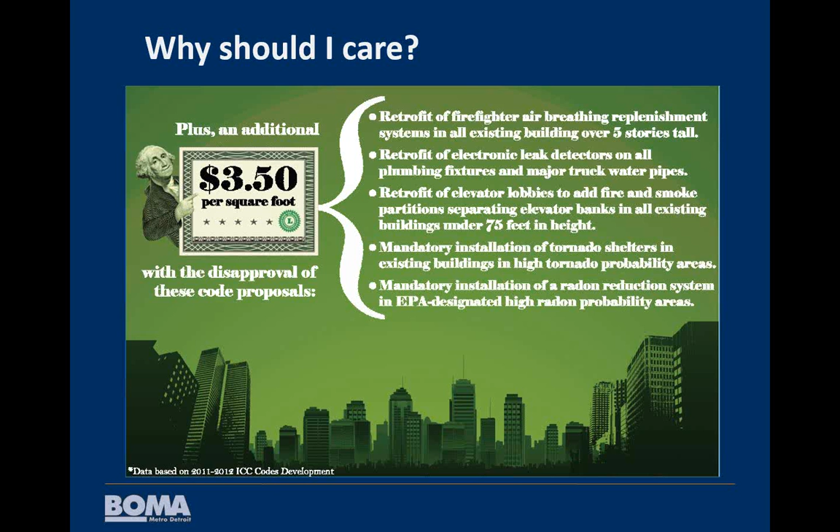So briefly, why I believe you should care about these things: there's a lot of money involved in code requirements. BOMA has done a great deal of work at the national level to affect the ICC codes, and they feel they've been able to bring about substantial cost savings, both by making changes to the current codes and also by keeping out some proposed changes that would be quite expensive to implement. I see here they were estimating about $3.50 a square foot. I think they now believe it's closer to $6 a square foot that they've been able to save building owners through the changes they've kept out of the code.

Just a little bit on the code cycle. I probably need to give everyone some background—codes 101, how do we develop and adopt building codes in the U.S. First, there's a model building code currently developed by the International Code Council. In years past, there had been several different groups that developed and promulgated model building codes, but they all came together back about 20 years ago, and since then there's just been one model building code used pretty universally throughout the United States.

They have a 3-year cycle, so every 3 years they come out with an updated set of codes. After they've developed and adopted them, Michigan takes those model codes, reviews the changes that have been made, and incorporates them into the administrative rules that are the Michigan Building Code. We have the advantage here in Michigan that the entire state is under the same code. In other states, each municipality can adopt their own code, but in Michigan it's one uniform code throughout the state.

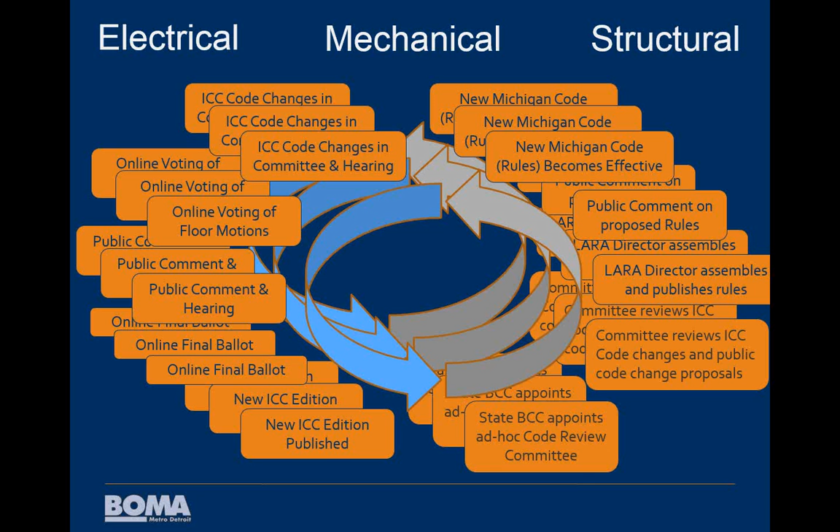There are also public hearings on the proposed rules, so you have opportunity to influence the process there as well. But it is a cycle, and there's constantly these 3-year cycles going on. There's electrical, there's mechanical, there's structural. They overlap. It becomes just a real churn of information going through. There's a lot of code development and code adoption work going on simultaneously all the time, and it's sometimes hard to figure out where you're at in the process and where you can step in to have some influence.

We're just getting started. The ad hoc review committee is just starting to review the mechanical and plumbing codes, and the next round of building code, existing building code, will be coming up, and they have not yet scheduled the ad hoc code committee review for those.

So now a little bit on what you should want to know about using the current building code. We thought we would present this by giving you a few examples. There's 3 examples that we have on working with the current building code. The first one is avoiding means of egress issues during tenant improvements or other types of alterations in a building. The next one is how to define work areas so that you can use the existing building code to limit the amount of code upgrade work that you need to do. And then finally, sometimes when you do get into additional work that has to be done to bring a building up to current code.

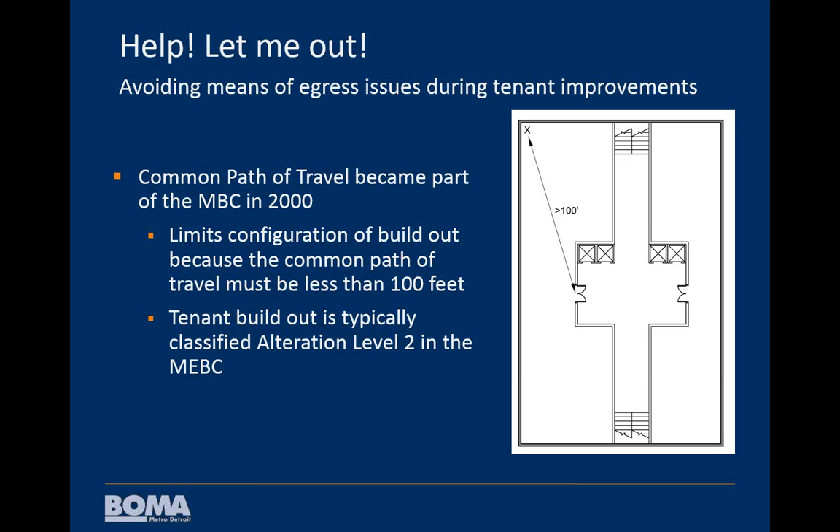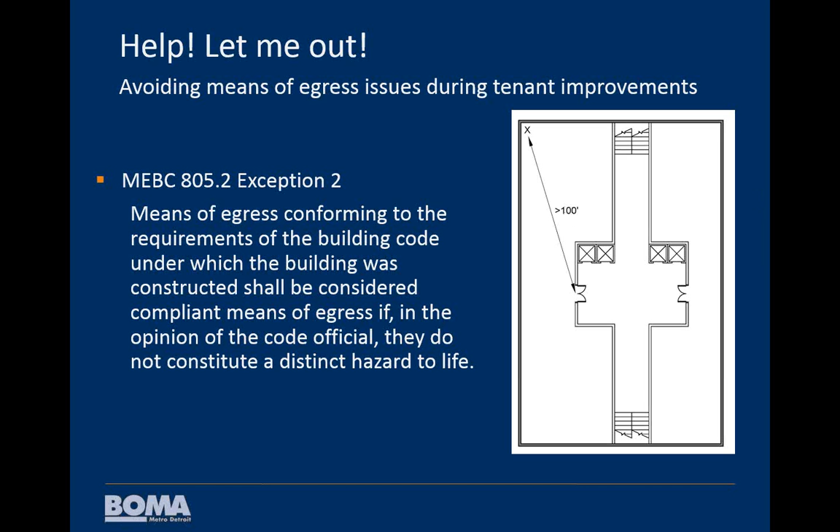It's a new concept just since 2000, but for building owners and managers, it affects tenant build-out, which are classified as alteration level 2 in the existing building code. But there is an exception. It's important to know that in existing construction, we generally consider that a building that was built safely under the code when it was built is still considered safe today. So generally when we are working with that building, we don't have to bring the entire building up to the current construction code, and this would be one of those opportunities where you can use this exception in the existing building code and basically circumvent that 100-foot limitation as long as the building official agrees that it's not a distinct hazard to life.

The next idea is to figure out how you want to work to stay between the lines. In general, when you're working on an existing building and making changes, you can define a work area. And so within that work area, there are certain code requirements that you need to meet. Outside of that work area, you're allowed to leave the building as it was originally constructed. So again, this is another project that Wayne worked on, renovation just in the first floor lobby in a 1960s building. The exit stairs from the upper floors came down into the lobby, and there are no sprinklers and there's no fire separation from this lobby to the adjacent spaces. Those are requirements that you would see in the current building code.

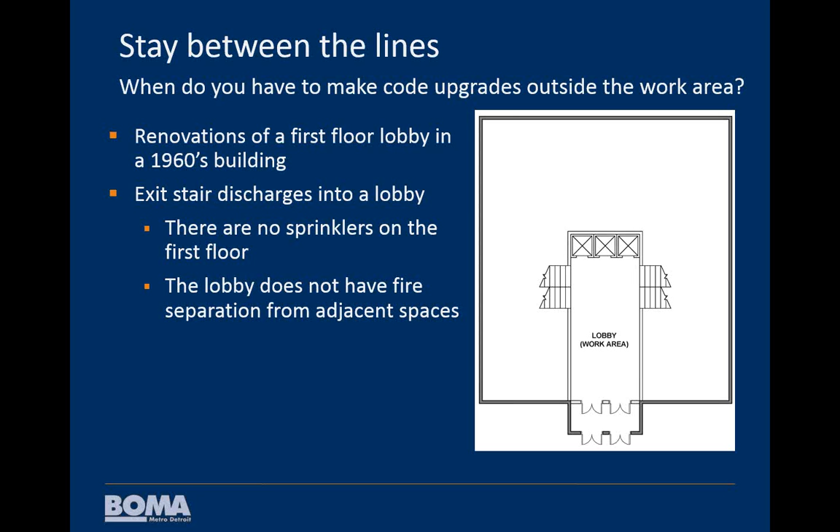So to avoid having to do more work outside of the work area that they've defined, they considered just putting in fire separation between the lobby and the rest of the building. But because of the open concept of the floor plan, that did not work out well for them. So they chose to install sprinklers throughout the first floor.

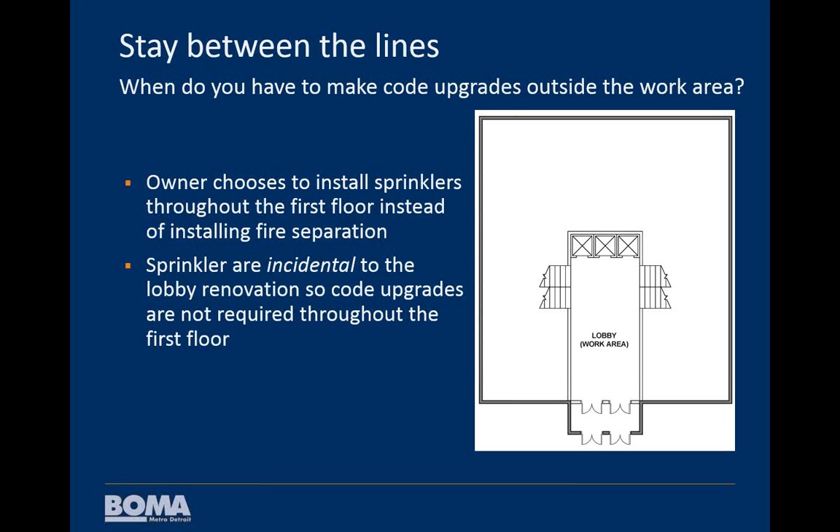But that doesn't really mean that you have a work area that covers the whole floor. You can do incidental work outside of the work area without having to bring the entire first floor up to the current code requirements.

The next project that we want to look at is one that I worked on, where we had a fairly large auditorium, a 10,000 square foot auditorium, built about 15 years ago in 1999. An important distinction is that in the last few years, sprinkler requirements have changed considerably in auditoriums. So much smaller auditoriums need sprinklers now than they did even just 15 years ago.

So things can happen that might bring about some changes in a building. One of the things we work on a lot is fire damage. So if you have a small fire in an auditorium like this, you can do repairs, and the existing building code allows you to classify those as repairs, and really just tells you that you need to use like materials, similar materials to what was there, maintain your means of egress and your fire protection. So there's really not a lot of code changes that are required in making repairs.

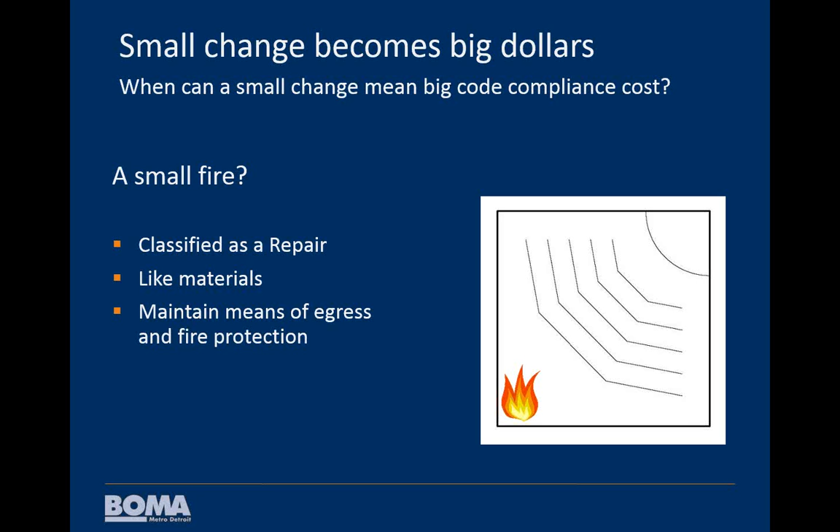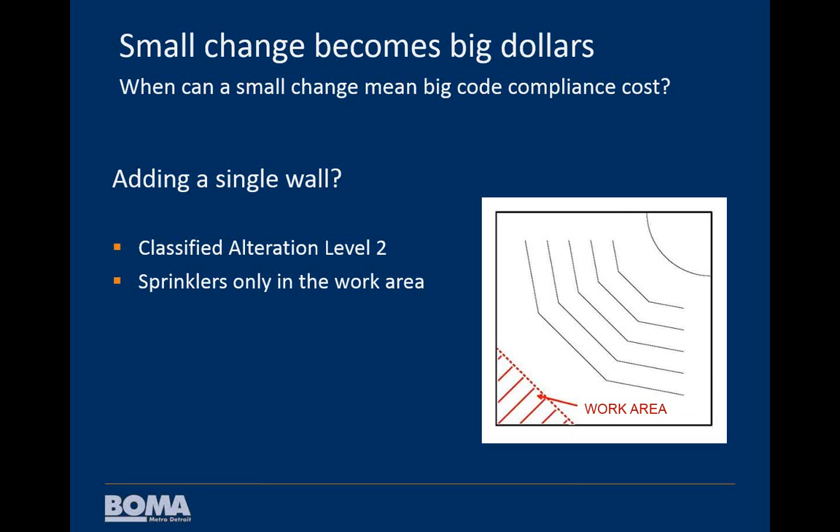If you want to instead make some alteration to your auditorium, for instance, if you wanted to create a more distinct entry space, so you wanted to put in a wall, that would be what the existing building code would classify as an alteration level 2. But again, that work area concept, you're allowed to define a work area as I've shown here, and then you really only have to meet the current code requirements in that work area. So then you would put sprinklers just in that small triangular area, and you wouldn't have to put sprinklers throughout the entire auditorium space.

But then another relatively small change that you might make would be to actually add an entry. So now you're increasing the floor plan of the building. That would be classified as an addition in the existing building code. But then you would hit that allowable size that's in the code, where it has decreased over time from 12,000 square feet down to 5,000 square feet. So now you have this large contiguous space that is your auditorium that would exceed that 5,000 square feet.

So then the code would indicate that you'd either have to put fire sprinklers in throughout that building, or you would have to make the interior wall of your addition a firewall to make the entry a distinct fire area, which then of course would require fire doors, not usually what you'd want as an entrance to an auditorium.

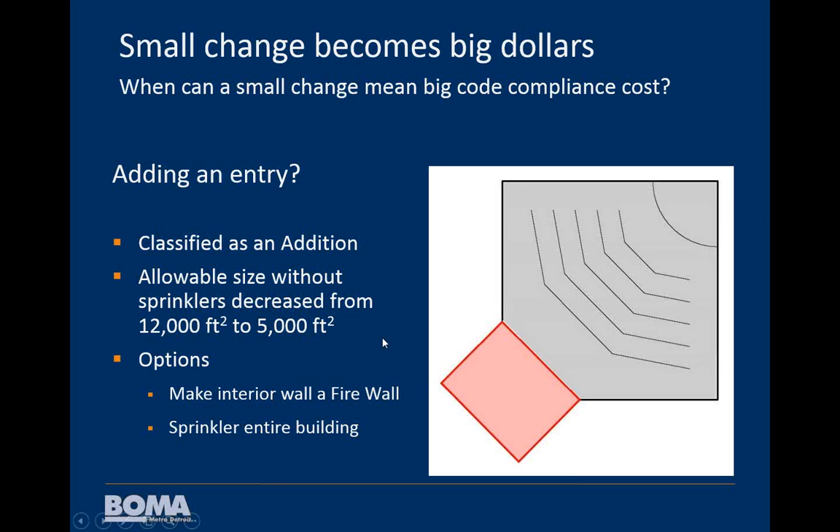So here we paused for a few questions, and I don't know, Mike, did you have questions that you wanted to ask here? I guess not, so we will just continue on then.

The next thing is to take a look at what some of the biggest changes are coming for the building code. In the 2015 ICC codes, we have a number of significant changes. If you're really interested in what's changing, there is a book published by ICC that documents all the significant changes. It's probably about a 150-page long book this cycle. Just a couple of the highlights.

One of the big things in the building code is that there had been a Chapter 34 that addressed code requirements for existing buildings. That is going to go away in the 2015 edition, so that you will now always refer to the separate International Existing Building Code.

Another change that seems to be becoming more common these days is having assembly spaces on a roof. I know the Detroit Opera House has such an assembly space. The codes are really working hard to try to catch up to this current trend, and so they've included some additional requirements for building construction, which includes, for instance, sprinklers being installed throughout the building to give those people on the roof opportunity to get down from the roof to the level of discharge.

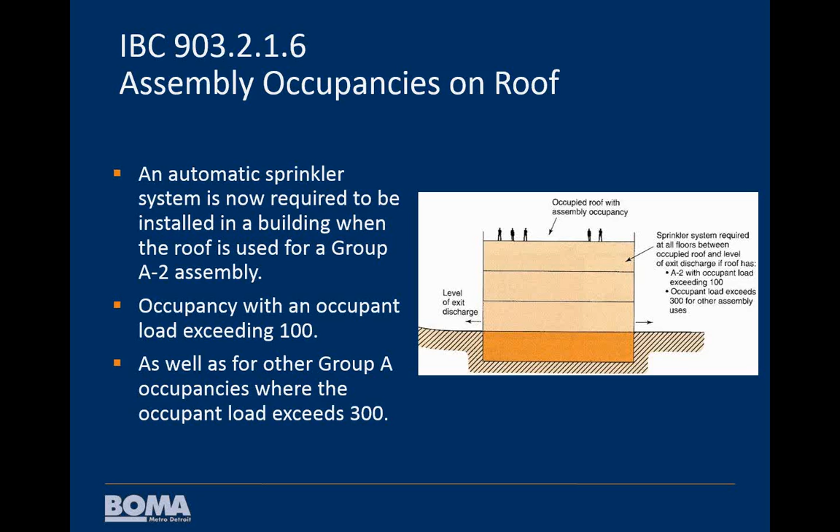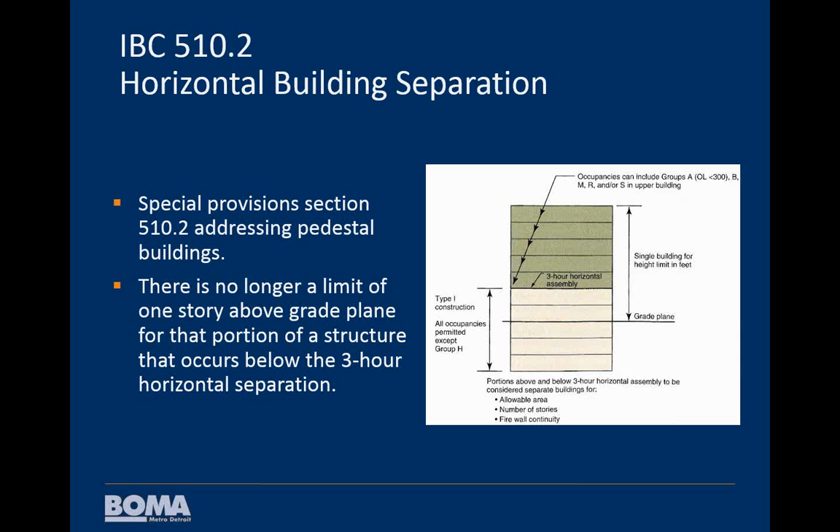Another significant change has to do with horizontal building separation, a type of construction they call pedestal buildings, where you have a different use on the first floor or the first several floors than you do from those above it. A lot of times this would be commercial or retail space on the first floors, or parking on the lower floors, and maybe residential units up above. So there's a change now that allows you to go more than a story above grade to have a taller pedestal to your pedestal building.

Another change has to do with the support of exterior walls. In general, if you have a floor that is providing some lateral support to your exterior wall, those have in the past always had to have the same fire rating as the exterior wall. They've relaxed that requirement to make it, in this particular example, so the floors could have a 1-hour rating when the wall has a 2-hour rating.

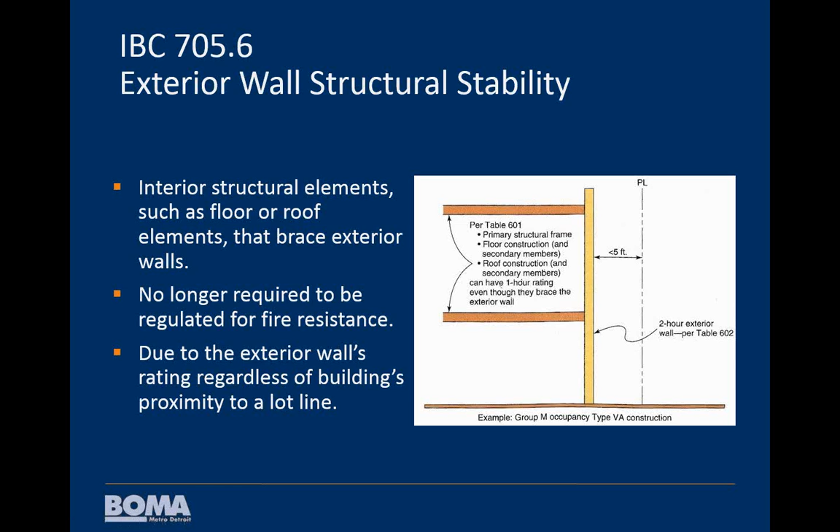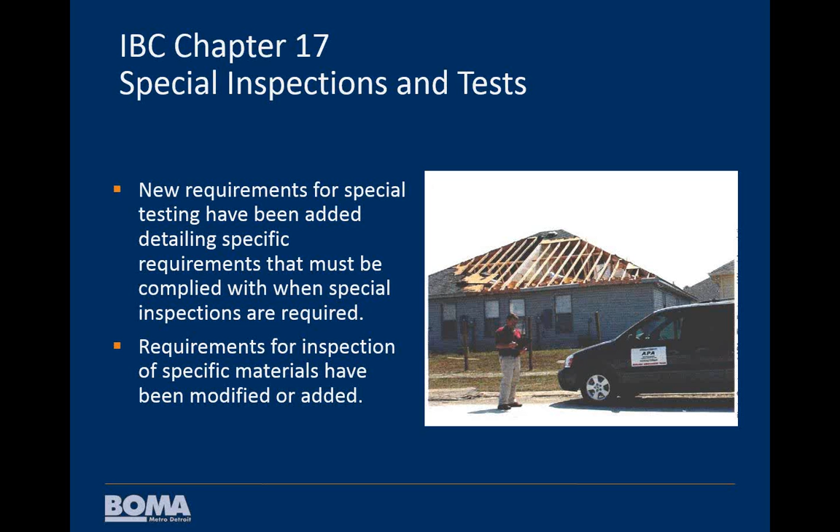And then finally, in Chapter 17, there is definition of special inspections that are required. This is a relatively new concept. It's only been in the building code since about 2000. The idea being that structurally significant portions of the building require special inspections to make sure they are constructed according to the design drawings. Since it's a relatively new concept, they've been developing this idea further as the years have gone by, and they've made some additional changes in this last cycle to provide some more specific requirements for that.

A quick look at some of the other changes that are coming. One would be with the International Green Construction Code, the IGCC. Basically, ICC was trying to develop a code that would be an equivalent and alternative to LEED type construction. They're working together with AIA, the American Institute of Architects, and also with ASHRAE, the American Society of Heating, Refrigerating and Air-Conditioning Engineers, and they're trying to make some changes to this code. They're going to work together and develop a new standard that will then become the basis for that construction code. It is expected at this point that it would continue to be a voluntary code, not a mandatory requirement, although some municipalities have considered making it mandatory.

Another thing we bring up every year as we go through code changes here with BOMA is discussion of state legislation that affects building codes and the other building regulations. The good news to report is currently there is not any pending state legislation that will be affecting the building codes.